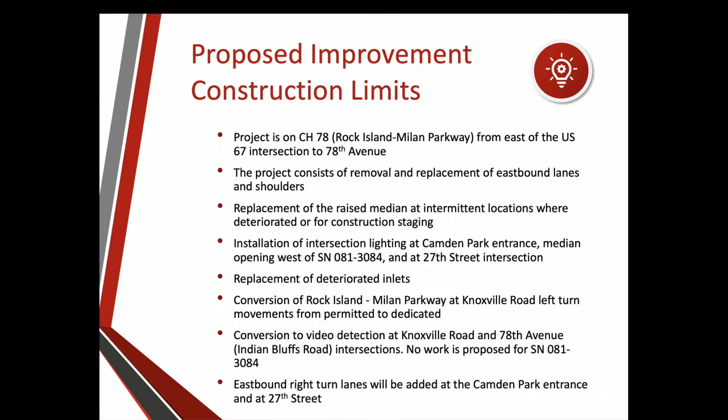So, eastbound right turn lanes, so both of the Camden Park entrance and that 27th Street entrance, they're both going to get dedicated right turn lanes from there. And if you want to go to the next slide, I can kind of show you, I'm going to walk up here. And if you guys don't mind cranking your head a little bit, or I'll- No, you're fine. But what we're going to do, you can kind of see it start here. We're going to go ahead and do dedicated right turn lanes. This is going to have a full shoulder on it now, a full hard shoulder on that side.

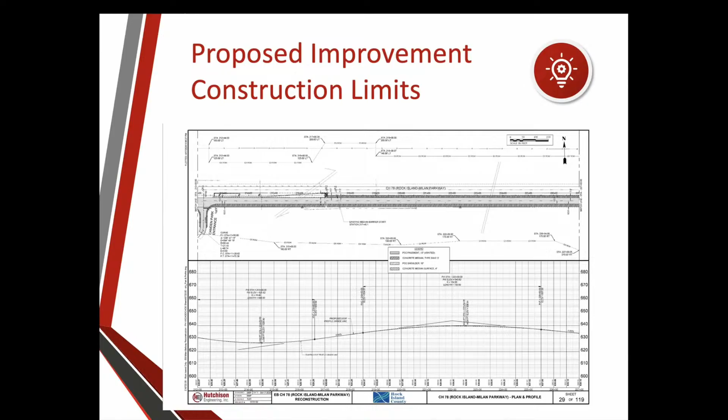And I was going to tell you, Chief Vazovich, that it will only be, I know a lot of folks, you can go to the next slide if you want. A lot of folks like to park there along there, like when fireworks are going on, whatever, and you know, that right hand turn lane with that 4-foot shoulder then will eliminate some of that. So there's going to be a little bit of enforcement necessary on your part. And if you want to go to the next slide, then I can show you.

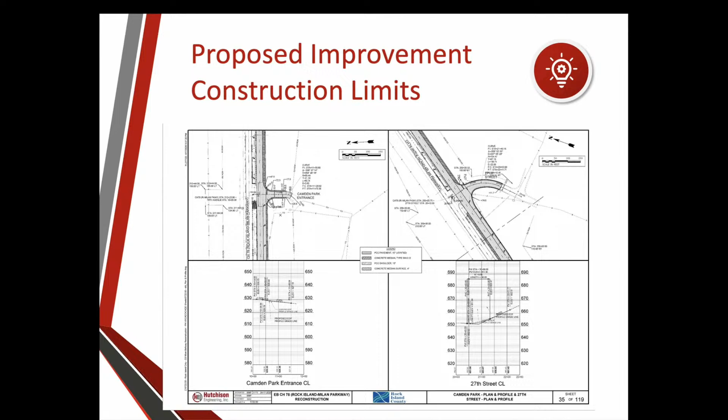So here, you'll see the same thing. There'll be one going into 27th Street, and it'll have that dedicated right-hand turn lane, but then that's when that shoulder narrows down to 4 feet there as well. These are the two entrances. Then it kind of calls out, and you can see it there in a little more detail. But that's the Camden Park entrance, and then the one at 27th. And so if you want to go to that next slide.

So part of the thing I want to talk to you a bit about is the staging of the detours, and that's what Karen was asking me those questions a little bit there. We are going to go ahead and take barrier wall out. We're going to move that over. We're going to run head-to-head on the traffic on the westbound lanes, and have just the delineators. They'll just be those epoxy down, poly delineators in between the travel lanes on that westbound side.

So that's where I say, whether it's a July letting or an October letting, the only work that'll happen this fall would be that traffic signal improvements and some of the temporary pavement preparation. So I think the last time, Your Honor, when we talked to you, we were still working on maybe trying to do a dedicated detour so we could do that 27th Street entrance all at once, and we weren't able to get that dedicated detour in place. So we're going to stage that entrance.

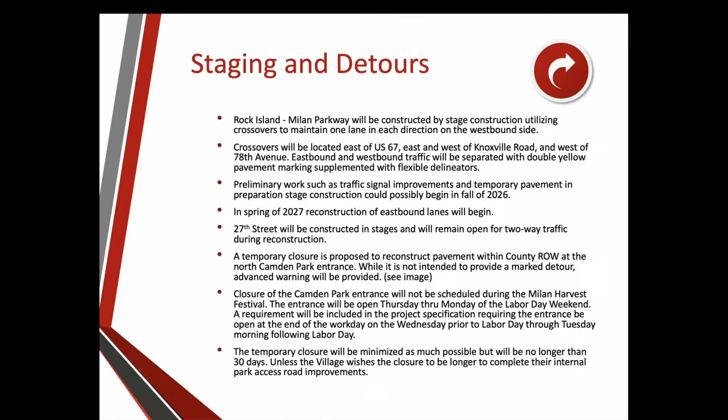So we do have to do a temporary closure. That's part of the reason we had to come and visit with you folks tonight, and I'll get into a little bit more detail. But the temporary closure proposed to reconstruct, we're only going to do what's in the county right of way there, but we have to close that North Camden Park entrance to do it. And we're not going to do a marked detour, but we've got advance warning that we're going to provide, and I've got that on the next slide.

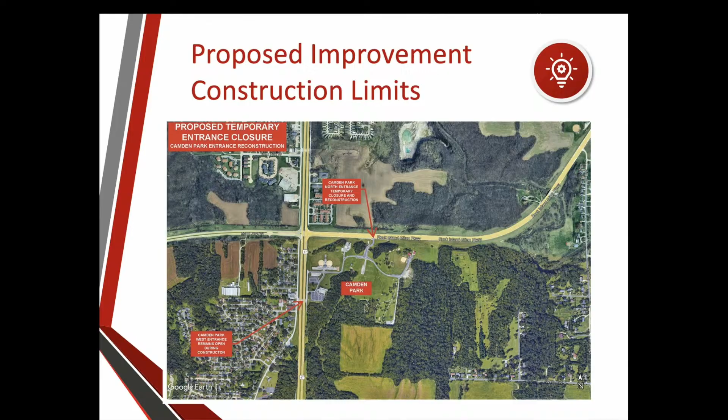So what we're going to do is basically notify folks and give advance warning, and the contractor will have to bring them around and bring them to this entrance and then down through here while we have this closed. And it's anticipated that this entrance is going to be closed for about 30 days of the construction period. So the contractor will need pretty much all that for the earthwork and those additional lanes that they're going to add on that south side.

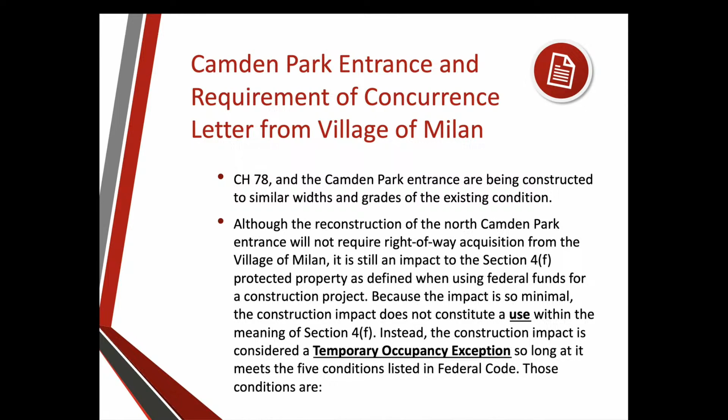So because this has got a lot of federal funds tied to it, and they call this a 4(f) project, it's just a category that they put it in for the reconstruction, I'm just going to read this through to you, because this is a little bit of nomenclature, I guess. It's not a major impact to you folks, but because we have to temporarily close that, and it is a public park property, the construction impact does not constitute a use within the meaning of Section 4(f), but instead the construction impact is considered a temporary occupancy exception so long as it meets these 5 conditions listed in the federal code, and I got those on the next slide.

And basically, the duration must be temporary, the time needed to reconstruct that entrance on the county's right of way. The scope of work must be minor, both in the nature and the magnitude of the changes, and we're not changing any of the profile on the county's roadway, we're not changing any of the elevations, and the alignment stays the same there except for that right-hand turn lane. So there are no anticipated permanent adverse physical impacts to your entrance, and the land being used will be fully restored all the way up to the right of way of your entrance, and it will be at least as good or better than it was before the project.

But we have to have a documented agreement with you folks, the owners with jurisdiction over that resource that we're impacting by closing your entrance for that temporary period. So the federal government's really specific, when you're using their money for a project, that we're not having adverse effects on anybody else that could be impacted by it.

So what we're asking you folks to do, and I think it may be later on in your agenda, is we provide a letter for you that basically spells out that the project, as you guys see it, doesn't have any negative adverse impacts to your entrance as long as we follow all those 5 things and put this back in a condition better than it was before. So, Your Honor, we're going to be asking you to approve that and provide it to us so we can put it in with our submittal for our plans and that tie on.

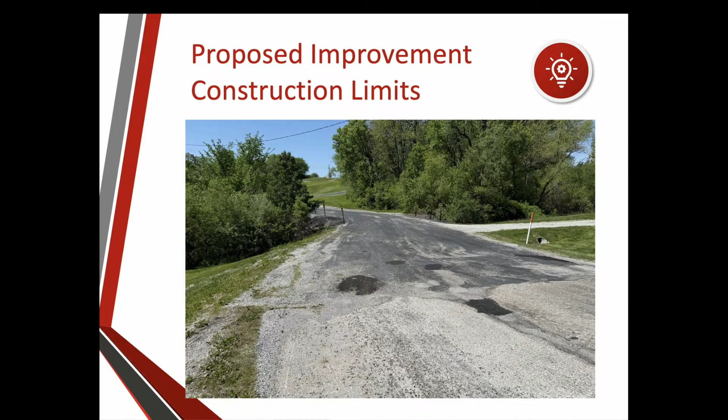Again, my name's Tom Clark with Hutchison Engineering. Like you said, we came up here in March to look at this, and a couple big things were drainage issues, drainage concerns, erosion control issues, and potentially realigning this entrance a little bit to provide a little bit more safety coming in. Drops off pretty good on both sides. We took some pictures so we can step through some of these next few slides, just looking at some of the pictures of the entrance.

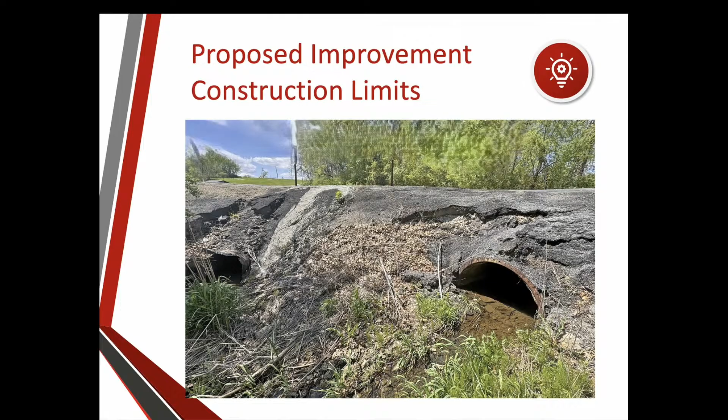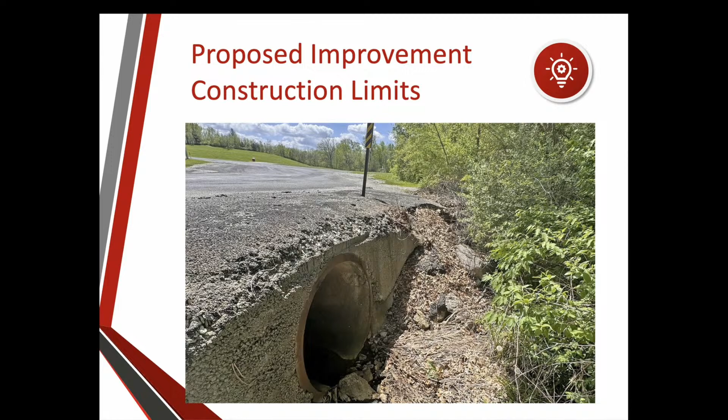This is on the east side of the entrance. There you can see on the right is supposed to be a 5-foot diameter culvert. Half of it's silted. This is on the upstream end on the west side of the entrance. It's in decent shape. No obstructions there. This is a 10-foot deep catch basin. I believe it's 36 or 42 inch CMP that discharges out there.

But one of the things that we were made aware of, I'm not sure how big of rain events they are, but pretty regularly it seems like it'll surcharge out of this inlet and drain overland across the pavement through here and down to the ditch, with a little bit of erosion issues with that. We want to take a look at what may be causing that to surcharge, if it's an undersized pipe or if that pipe's crushed at all or what.

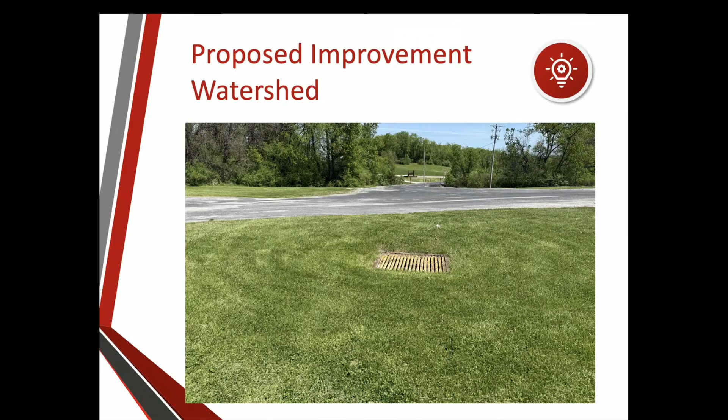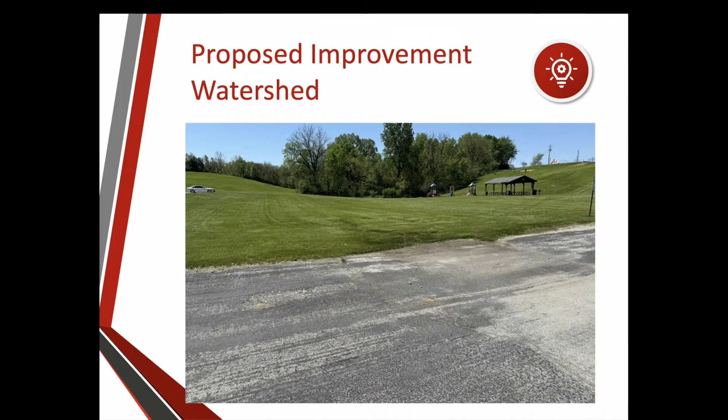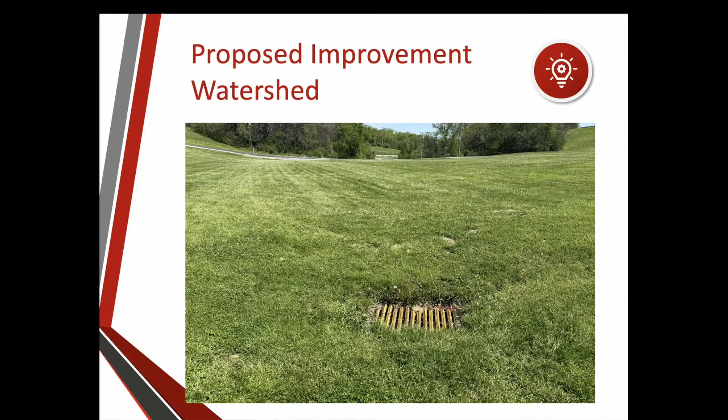And then that's when I got into looking at the overall drainage area. This is one of the ravines back here. There's a 42-inch CMP that comes out of there too. There's about 400 acres that will concentrate to just this entrance there. So a bit of erosion out there. And that's another catch basin that's further south, closer to that ravine. So there's a tremendous amount of flow is what you're saying? Yeah, there's constant flow through there all the time.

This is just to give you a big idea of what the drainage area is for this. We're talking entrance way up here and it stretches far south down there. That outline of that watershed, there's 400 acres. That watershed comes down to that one choke point down in there. So that's the point that almost goes all the way to Queen Center, correct? Yes. That ditch that you're referring to? Yes. Yeah, that's quite a long distance. A lot of water.

And so one of the things that we had talked about in our discussion is that we don't necessarily have to worry about trying to convey all that through a network system, but we need to make sure that for the rain events you're getting, if you say, hey, we want to design something that's going to be adequate for a normal rain event, just understand you have every right to let it use an overland route as long as it's not damaging any kind of personal property for a 10-year event or 50-year event or 100-year event even.

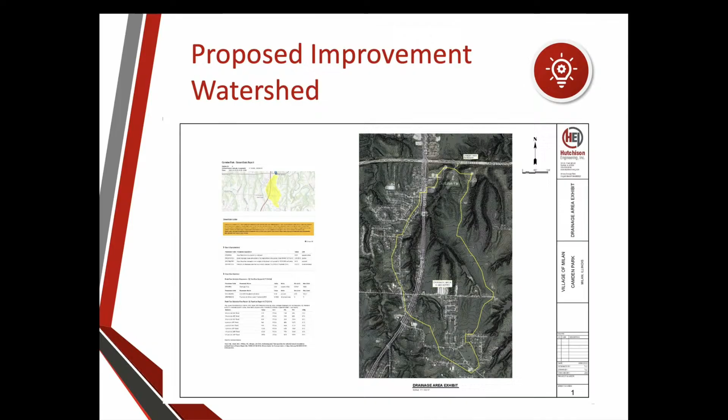But what we put in our proposal, I think we wanted to give Tom enough time to at least study that area, not to do a full hydraulic model, but just to understand it enough to say, okay, we think you could probably manage with a certain size pipe. You could probably manage a 10-year event adequately and still keep your roadway without being part of the conveyance network. But for something bigger than that, we may have to have a combination of both. We put a proposal together that we sent your staff. I think it may be on the next slide, of what we thought we could do to hit some of the moving parts, and I'll let Tom walk through it.

And Gibby, isn't that where you have RVs and stuff dump in? Would that affect that? It's right here. Oh, okay, that's into the sanitary. Okay. The problem that he's talking about is the water comes down, gets to this point, and then it comes across and it's washing out this area on this side. So the fact that it's going overland through the park is not the issue, but once it tries to come back into the ditch line, we have that erosion, and we have a difficult time because it was never really designed to accommodate that. Right.

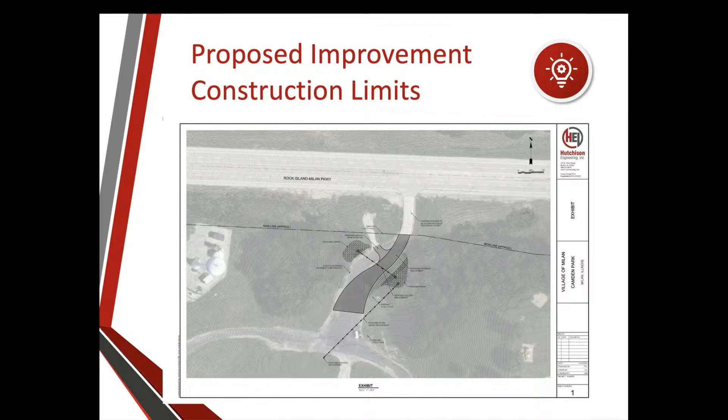So some of our thoughts were to first give you, and this is without the benefit of design, more than throwing a dart on the wall, what we anticipate some of the construction costs would be. We thought it best to give you that so you have an idea before you give somebody the go ahead to start working on the design, to give you a budget figure. It's got a 10% contingency because there are a lot of unknowns, but it's a budget figure on what we think the construction would be. What's the number? It's 331.

We're anticipating $301,000 to do that construction project, with a 10% contingency, so it's $331,000. And what I've got on here is an estimate from Jim Abbott. He does a lot of survey work, and quite frankly, it's cheaper for a community like yours to let us hire Abbott than to use our own surveyors, because they would come from one of our different offices, and it would just cost you more. So Jim does good work. Jim's solid. So have Jim do some survey.

We got about $6,400 in there for Tom to do some drainage study. It wouldn't be a model. We wouldn't do a full-blown hydraulic study on that 400 acres, but we would try and anticipate the impacts that you guys are seeing down there through the watershed. And we've got $6,400 in there to do a conceptual layout that would get us ready to come back to this public body and talk to you about what we think it would look like, making those line of sight improvements. You've got a pretty steep slope right there, so I'm sure it's tough for Gibby and his staff to keep that from eroding, even when you are using that overland route for heavy events. But we could come up with a conceptual drawing that tries to address all that.

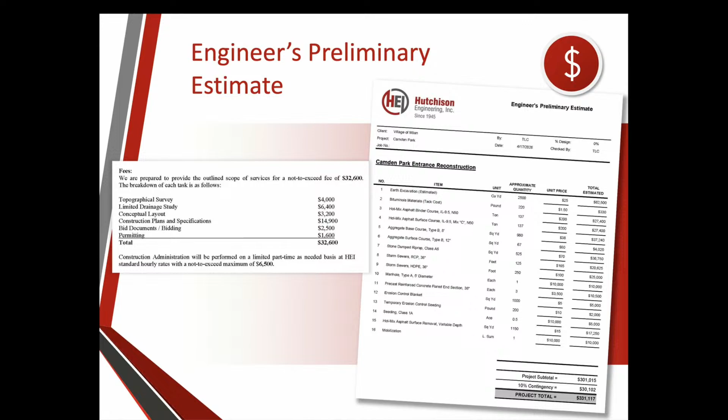Rock Island County, though, is using Willett Hofmann to oversee that, because we did the design on it, and we like that checks and balances. So Willett Hofmann will be overseeing our job on County Highway 78, so they'll have some folks there too. If they work for you now, maybe they'd be willing to oversee the job for you in construction too. You got anything else you want to add? Just wanted to say, if this is something you would be interested in, I can put a formal agreement together and give it to you for your consideration at a later meeting.

So I think we'll cover that at 13, the next one. Okay, I look for a motion for Hutchison Engineering discussion on the Camden Park entrance. I make a motion to accept it. Second. Okay, motion made and seconded. You second that, Jerry? Yeah. All in favor by saying aye? Aye. Opposed? So carried. Now, 13 kind of corresponds with some of this. It's consideration of approval of a letter of concurrence of no adverse impacts to Camden Park from the Rock Island Parkway Road Project.

And I understand part of this, talking with Steve when I worked on my agenda, that if the board's interested in going with Hutchison Engineering to do this project, they're already working in there. We're kind of piggybacking on their project with the Parkway, and so we would agree, if you agree to that, to a letter of concurrence, which is, you're just agreeing to go with them on that too. The letters are for the requirement of the federal funding for the Rock Island Parkway project.

That's the letter they use for the first presentation. This is just no adverse impact. We're concurring that, yeah. Yeah, like she said, we agreed to the project, this is just a letter that they have to send IDOT, is what you're saying. Yeah. I'll make a motion. I'll second that. All in favor by saying aye? Aye. Motion carried.